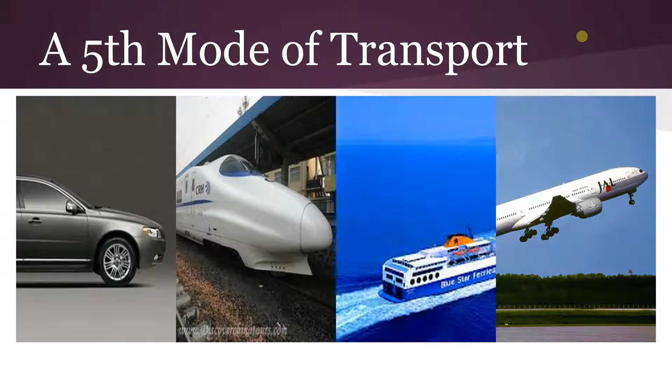For years, the world has relied on 4 basic modes of transportation, but what if there was a 5th mode? A type of transportation that costs less than current modes while still being safer, faster, and more convenient, all while being completely powered by sustainable energy.

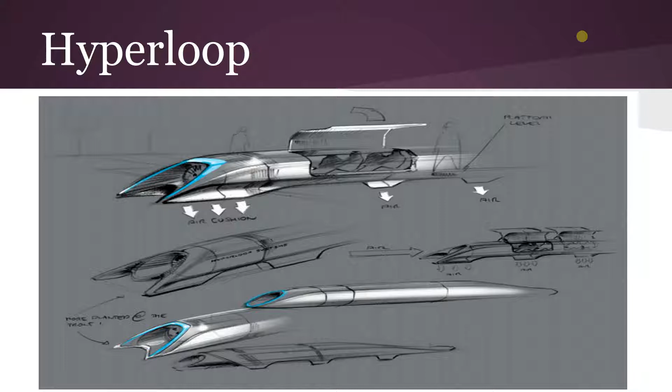Introducing the Hyperloop. It is a conceptual high-speed transportation system put forward by famous entrepreneur Elon Musk. The idea incorporates tubes in which capsules ride on a cushion of air and are driven by a combination of magnets and air compressors. Let's talk more about each component of the Hyperloop.

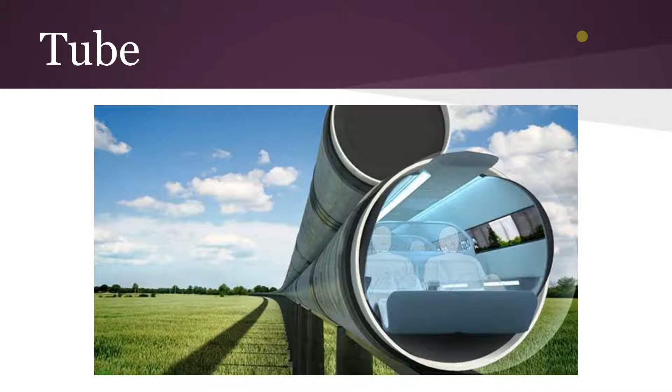Steel tubes that measure 7 feet 4 inches in diameter will be welded together in a side-by-side configuration to allow the capsules to travel both directions. Pylons are placed every 100 feet to support the tubes. The tube is specifically sized to provide optimal airflow around a capsule, improving performance and energy consumption at the expected travel speed. Sealed capsules that can carry 28 passengers each will travel along the interior of the tube.

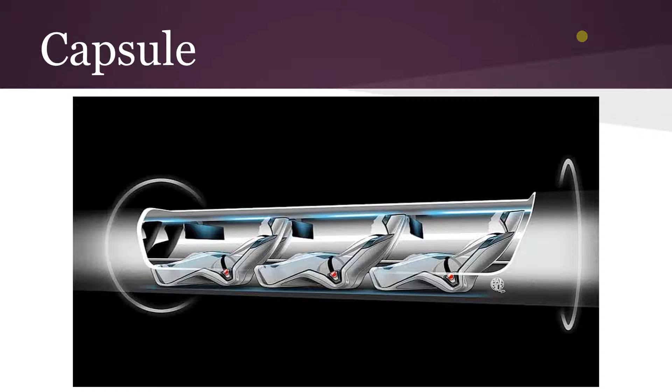The capsules depart from the station every 2 minutes under normal demand and every 30 seconds during peak usage hours. The capsules are separated within the tube by approximately 23 miles during operation. The capsules are supported via air bearings that operate using a compressed air reservoir and aerodynamic lift. Magnets, or stators, are mounted along the length of the tube at various locations and work with the rotors that are attached directly to the capsule to accelerate and slow down the capsules as needed.

For travel at high speeds, the greatest power requirement is normally to overcome air resistance. Aerodynamic drag increases with the square of speed, and thus the power requirement increases with the cube of speed. For example, to travel twice as fast in a vehicle, the vehicle must overcome 4 times the aerodynamic resistance and input 8 times the power.

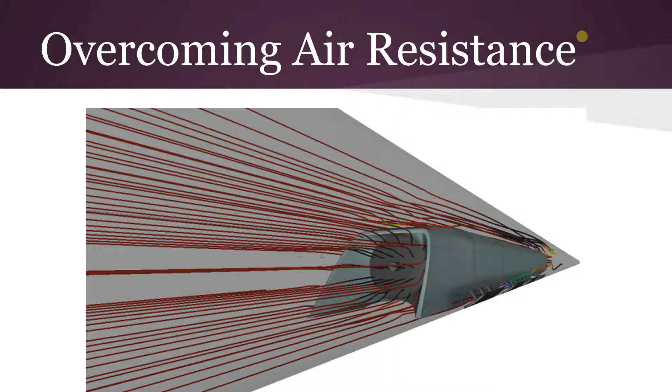Just as aircraft climb to high altitudes to travel through less dense air, the Hyperloop encloses the capsule in a reduced pressure tube. The air pressure inside the tube is about 1/6 the pressure of the atmosphere on Mars. This means the drag force is reduced by 1,000 times relative to drag at sea level conditions, and would be equivalent to flying at an altitude over 150,000 feet. In addition, the capsule features streamlined aerodynamics and an air compressor to further reduce air resistance.

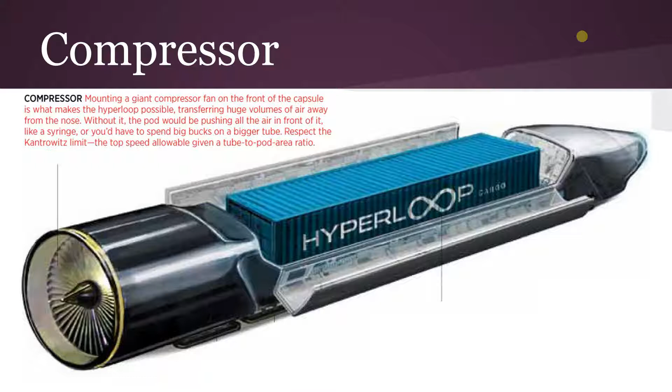The compressor serves 2 purposes. First, without the compressor, there would be a large buildup of air mass in front of the capsule, which would greatly increase drag. The compressor allows the capsule to travel in the narrow tube without choking the airflow that travels between the capsule and the tube walls by compressing the air and then sending it through the back of the capsule. Secondarily, the compressor also supplies air to the air bearings that support the weight of the capsule inside the tube throughout the journey. The Hyperloop travel journey will feel very smooth since the capsule will be guided directly on the inner surface of the tube via the use of air bearings and suspension.

Suspending the capsule within the tube presents a substantial technical challenge due to the transonic cruising velocities. A conventional wheel and axle system becomes impractical at high speed due to frictional losses and dynamic instability. A viable technical solution is magnetic levitation. However, the cost associated with the materials and construction is prohibitive. An alternative to these conventional options is an air-bearing suspension. Air bearings offer stability and extremely low drag at a feasible cost by exploiting the ambient atmosphere inside the tube. Put simply, imagine the capsule floating inside of the tube like a puck on an air hockey table.

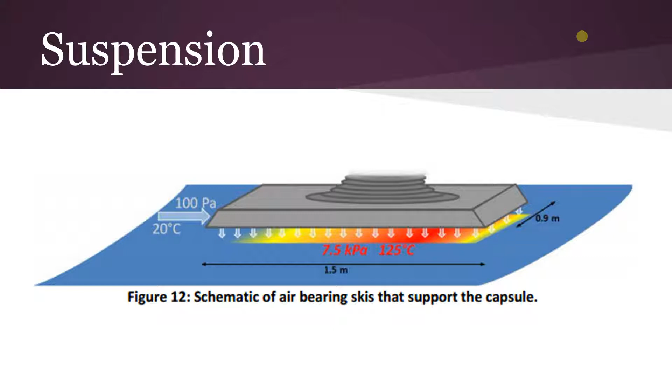Hyperloop stations are intended to be minimalist but practical, with a boarding process and layout much simpler than airports. Due to the short travel time and frequent departures, it is envisioned that there will be a continual flow of passengers through each Hyperloop station, in contrast to the pulsed situation at airports, which lead to lines and delays. Safety and security are paramount, and so security checks will be made in a similar fashion as the TSA does for the airport. The process could be greatly streamlined to reduce wait time, and maintain more continuous passenger flow.

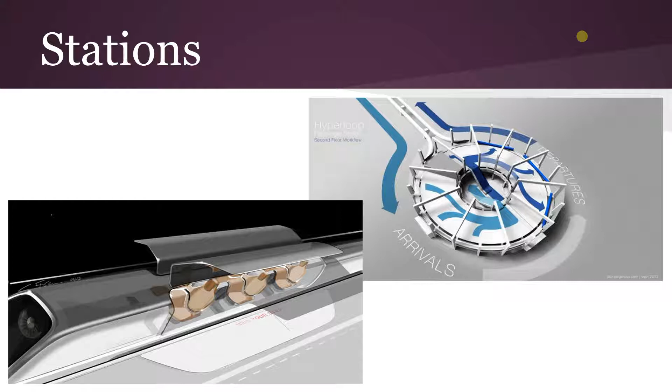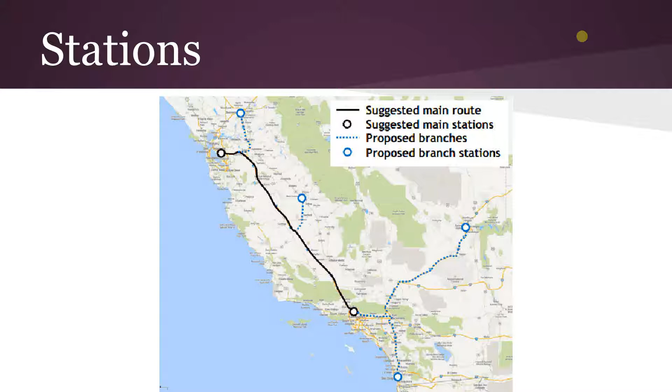The stations are isolated from the main tubes as much as possible in order to limit air leaks into the system. The major stations for Hyperloop are suggested based off high traffic regions between major cities. The largest cities in California, such as Los Angeles, San Francisco, San Diego, Sacramento, and Fresno, are being considered for station locations. One additional traffic corridor that will be considered early on will be between Los Angeles and Las Vegas.

By placing solar panels on top of the tubes, the Hyperloop can generate far in excess the energy needed to operate. This takes into account storing enough energy in battery packs to operate at night and for periods of extended cloudy weather.

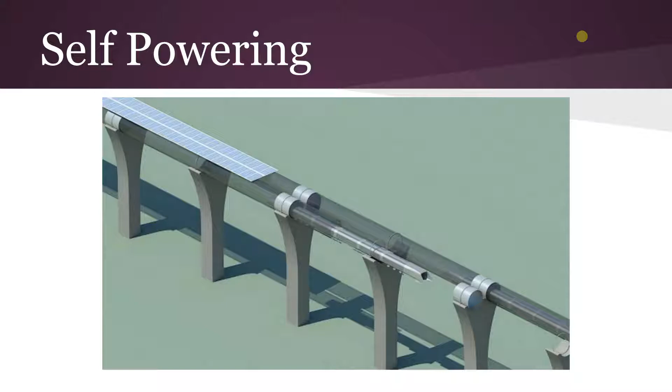The design of the Hyperloop has been considered from the start with safety in mind. Unlike other modes of transportation, the Hyperloop is the single system that incorporates the vehicle, the propulsion system, energy management, timing, and route. Capsules travel in a controlled environment, making the system immune to wind, ice, fog, and rain. The propulsion system is integrated into the tube and can only accelerate the capsule to speeds that are safe in each section. With human control error and unpredictable weather removed from the system, very few safety concerns remain.

All capsules would have direct radio contact with station operators in case of emergencies, allowing passengers to report any incident. In addition, all capsules would be fitted with first aid equipment. The Hyperloop allows people to travel from San Francisco to Los Angeles in 35 minutes.

Therefore, in case of an emergency, it is likely that the best course of action would be for the capsule to communicate the situation to the station operator, and then for the capsule to finish the journey in a few minutes where emergency services would be waiting to assist.

The vast majority of Hyperloop travel distance is spent coasting, and so the capsule does not require continuous power to travel. The capsule life support systems will be powered by 2 or more redundant lithium-ion battery packs, making it unaffected by a power outage.

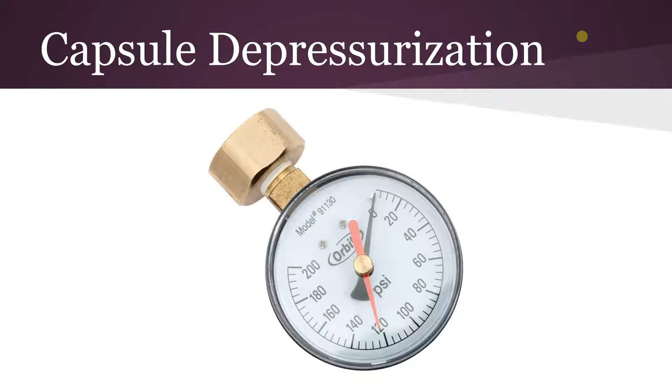A capsule becoming stranded in the Hyperloop tube is highly unlikely as the capsule coasts the majority of the distance at a high speed, and so there is no propulsion required for more than 90% of the journey. If a capsule were somehow to become stranded, capsules ahead would continue their journey while capsules behind would be instructed to stop. Once all capsules behind the stranded capsule have been safely brought to rest, capsules would drive themselves to safety using small onboard electric motors to power deployed wheels.

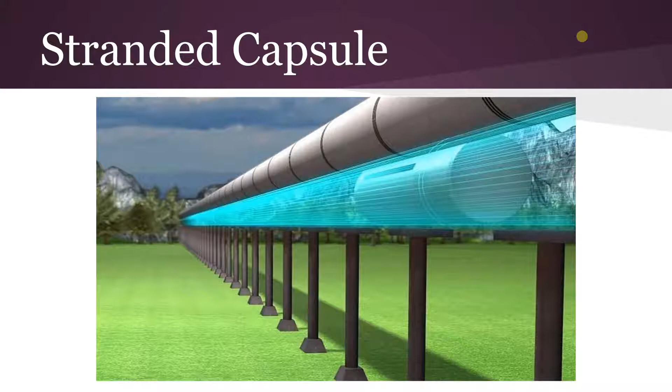All capsules would be equipped with a reserve air supply great enough to ensure the safety of all passengers for a worst case. California is no stranger to earthquakes, and transport systems are all built with earthquakes in mind. Hyperloop would be no different, with the entire tube length built with the necessary flexibility to withstand the earthquake motions while maintaining the hypertube alignment.

Each pylon will be equipped with 2 adjustable lateral dampers and 1 vertical damper. These would absorb the small length changes between pylons due to thermal changes, as well as long-form subtle height changes. As land slowly settles into a new position over time, the damper neutral position can be adjusted accordingly, allowing for continual adjustment.

Hyperloop would feature the same high level of security used at airports. However, the regular departure of Hyperloop capsules would result in a steadier and faster flow of passengers through security screening compared to airports. Compared to planes and trains, each capsule contains a smaller amount of passengers, meaning that they would less likely be targets. Also, the capsules are not drivable and therefore could not be used as a weapon like a plane can.

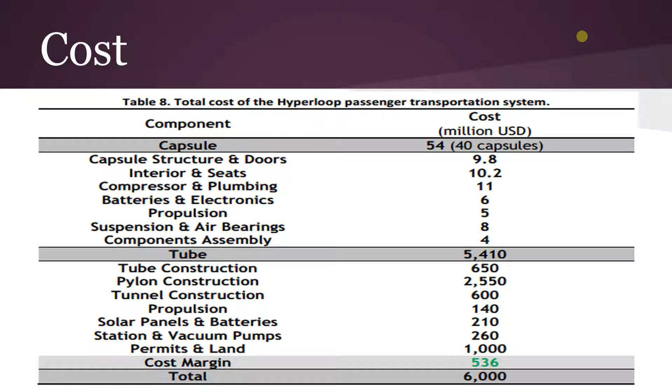As we see here, the total cost of the hyperloop is estimated to be under $6 billion for 2 one-way tubes and 40 capsules to carry passengers. The current high-speed rail in California is estimated to cost $68.4 billion for a train that averages 164 miles per hour. Even if the hyperloop quadrupled its estimated budget to $24 billion, it would still cost less than half of the proposed high-speed rail.

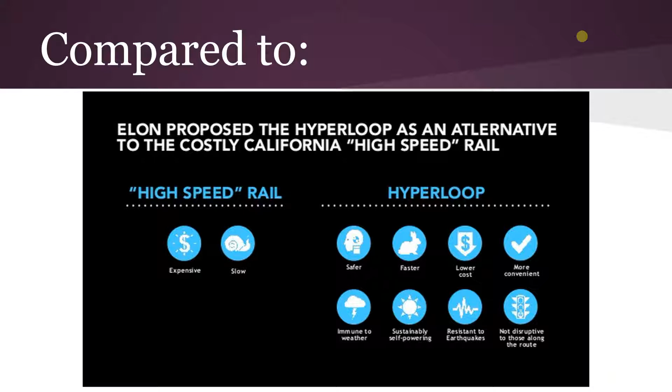Given the route, the design, and the logistics, the hyperloop can transport 7.4 million people per tube each year. Amortizing the construction costs of $6 billion over 20 years, and then adding the daily operational cost, it comes out to be $20 per one-way ticket on the hyperloop. As stated before, the life of the hyperloop would be 100 years. This means the first 20 years would cover the cost of building it, with the last 80 covering daily operational costs and repairs.

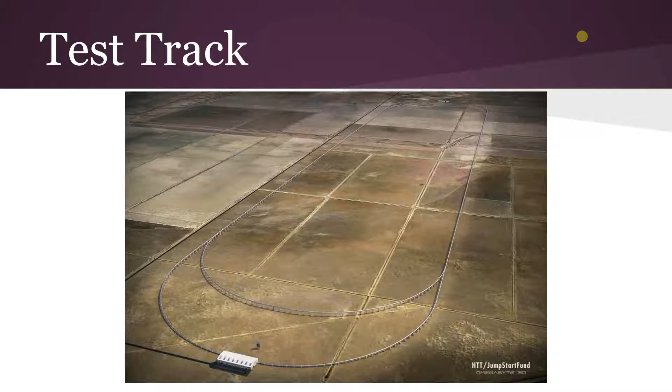Until recently, the hyperloop idea has been mostly a theory, but recently there has been more fuel added to the hyperloop fire. On January 15th of this year, Elon Musk tweeted that they will be building a hyperloop test track for companies and student teams to test out their capsule designs. This will most likely be built in Texas.

Then, in February of this year, it was announced that a group called Hyperloop Technologies has stepped up as the first funded Hyperloop startup company, armed with $8.5 million of seed money and plans for another $80 million funding round later this year. Hyperloop Technologies has hired a dream team. They have enlisted a formidable lineup of Silicon Valley and Washington superstars, most with a strong connection to Musk. This company has several groups currently working for them.

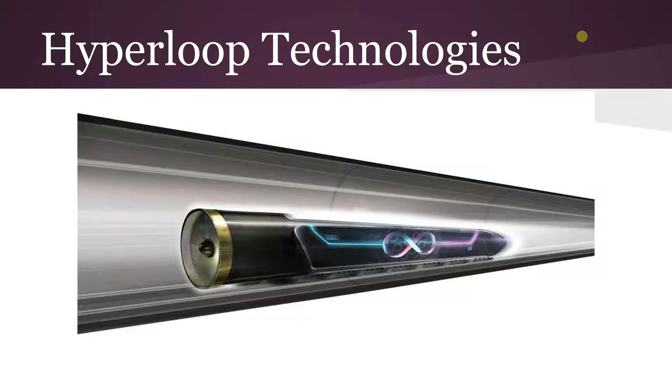They have a group of math students at Harvard building a fairly advanced route optimization model that plans the cheapest and least nauseating path to link any city pair. They have an electric motor company in Portland working on the capsule's propulsion system. They also have a team of UCLA architecture students who have created scale models of passenger interiors out of wood.

While the idea is still an estimated 10 years out, Hyperloop is picking up a lot of steam. Hyperloop Technologies has stated that there is no turning back now, and there is plenty of financial and political backing to take the Hyperloop from a dream to the fifth mode of transportation.